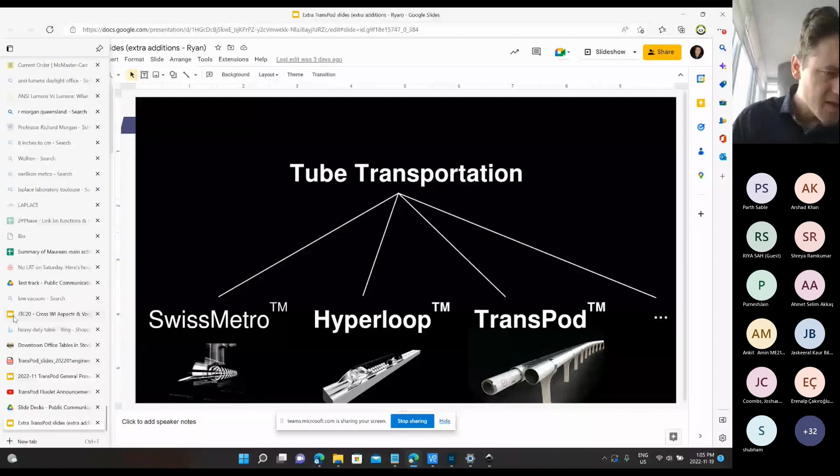Okay, so what I will start out with is a little bit of an overview, straight from the beginning. My own interest is really at the connection between new technology and things that affect people on a massive scale. And that's definitely the case with transportation, because you can't just have an idea that's not really deployable at a huge scale.

And so with big infrastructure projects, there's a lot of financial and practical things you have to think about, but also the human aspect too. How does it affect people, and how do people want to travel? But really incorporating the latest research.

And so my name is Dr. Ryan Janzen, and like I said, this is just going through this. That's kind of my background. And so that all has led up to TransPod. And TransPod is a new type of what I would call tube transportation.

And so these are, by the way, I'll show you some of the exciting new stuff, because these are a little bit old, from years ago. But really the core, and then I'll show you the latest technology that we've actually finally unveiled to the public of what we're really working on.

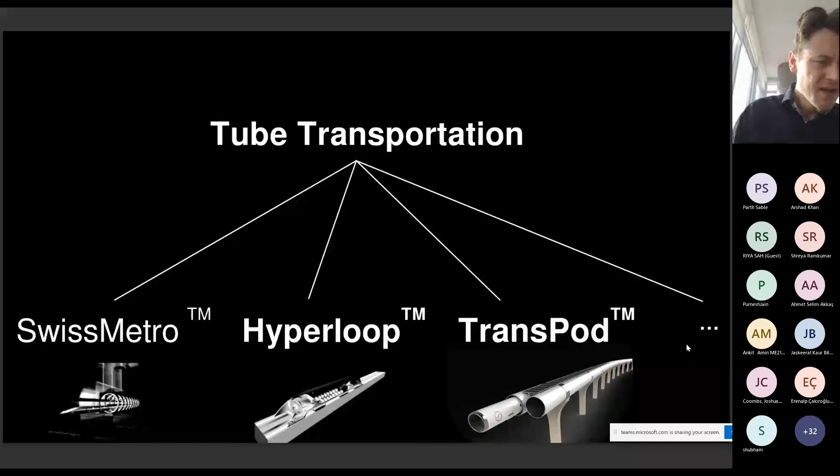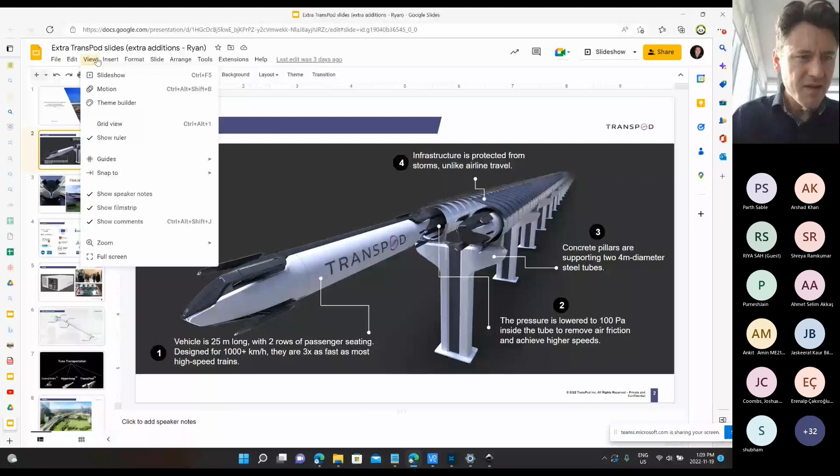But what I'm going to show you is how this new TransPod system, it's not Hyperloop exactly, it's this new type of tube transportation. And you saw those really old renderings, and so what's kind of exciting is some of the latest vehicle designs that we have just unveiled to the public, and I'll just show right here. Oh yes, use slideshow, there we go.

So it's this new thing that I invented a few years ago, but has been very confidential up until now, which is called the FluxJet. And so I'm going to explain what that actually is soon. But the basic thing, when you look at it, it's a new type of vehicle that is a bit of a mix between an aircraft design, operates like a train, but what it actually has is a whole flight control system and some pretty advanced physics.

So on the outside, it might seem like this is just tube transportation, but the way we're designing it is radically different. And some of that has been unveiled to the public, but some of the special features have not yet been announced. So they'll be announced soon. So it's all coming one step at a time. But this is part of the TransPod system.

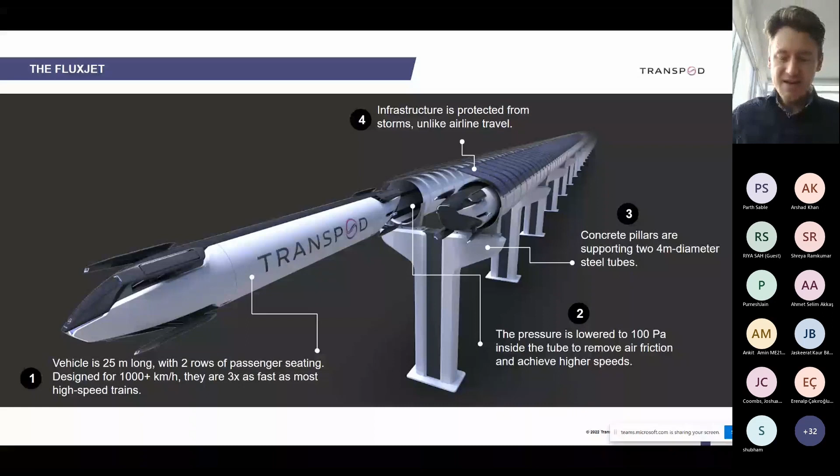That's just a rendering, but we've done experiments with all of these propulsion systems, testing them at over 1,100 kilometers per hour aerodynamic speed, because there are aerodynamics. Even with a somewhat low pressure, you still have them, and so that's part of why we're working with a few aerodynamics experts, including Pierre Sagaut, who's one of the guys who writes the textbooks on supersonic flow and shock waves and so on.

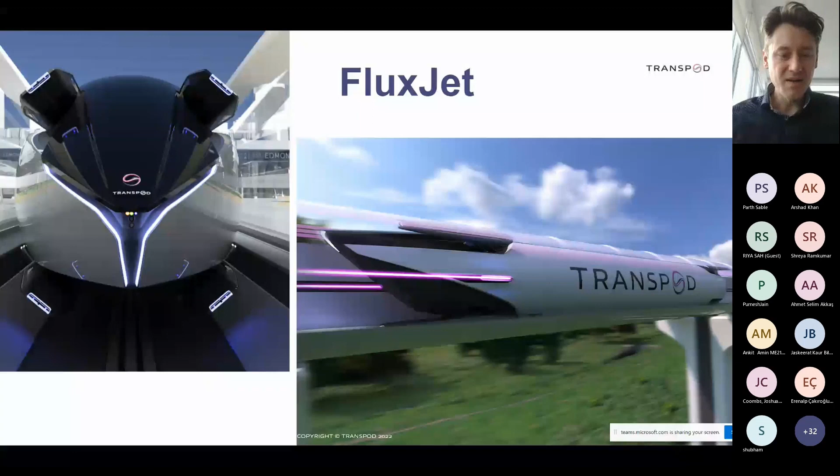But we actually have separate experts in our own team that have been developing this plasma technology. It all fits together, and so it's a really big collaboration. So the TransPod team, basically I'm the inventor of the FluxJet and the designer of the overall system. And our team is in Canada, and some people in a couple of different locations in Europe, where we have centers of excellence of our own team, plus some of these partners.

And actually, it's amazing how a really big project involves a lot of work. Just to see the scale of this, imagine the whole vehicle, like an aircraft. When Boeing or Airbus designs a new aircraft, they have a lot of different subsystems over the whole thing, right? And all of those units are a big design project on their own. So one example for us is this small thing within all the power systems on the vehicle, on this TransPod system and the FluxJet. You break it down in a kind of tree structure, right?

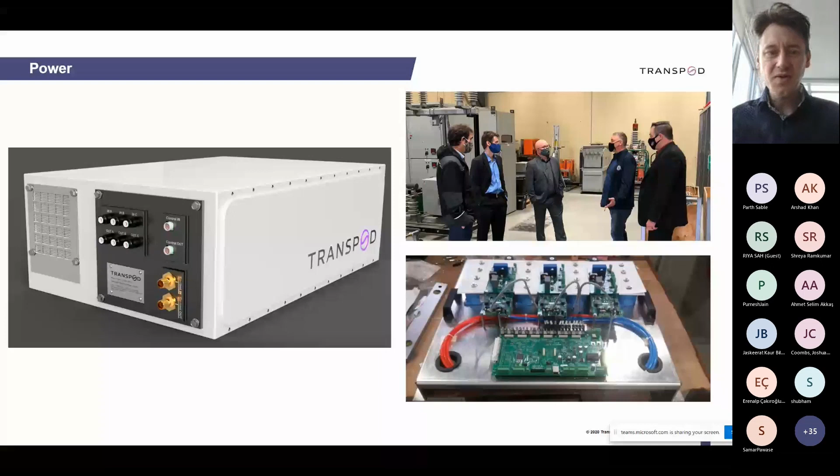So all of this gets broken down, and then how does it get developed? Well, when you think of all these subsystems being put together at the same time, you have to test them. We have been testing high speed; we have the equivalent of a high altitude NASA experimental aircraft environment. We're able to recreate those conditions with high voltages in the kilovolt range, low pressures, and high speed aerodynamics.

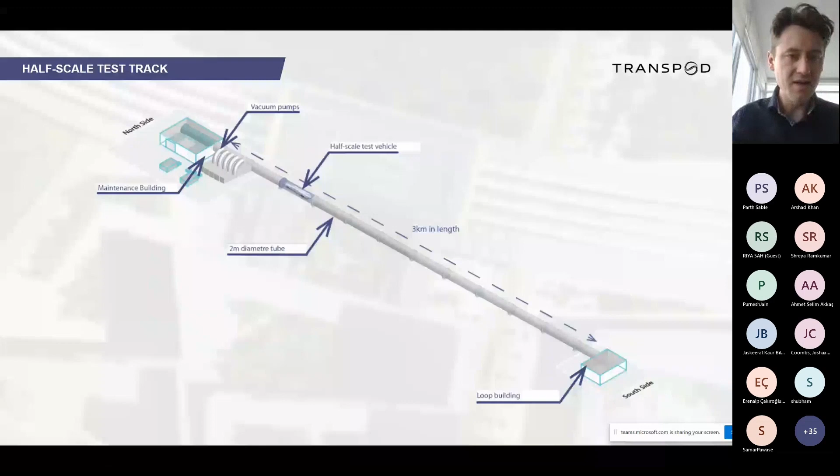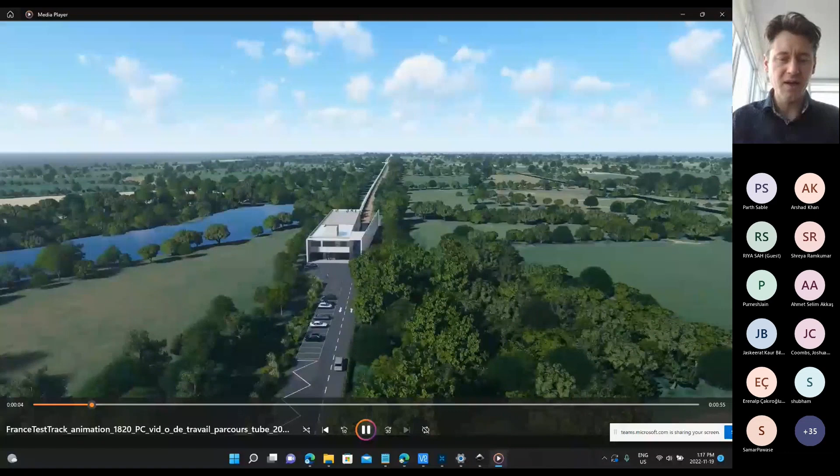With all the different test vehicles we're building, there's a couple things coming next. This is a picture of one where we have the construction permit approved and have started construction in central France. This is a half-scale test track, and maybe I'll just show, I think this one would be nice, to get a little sense of it. It's similar for our bigger scale test track in Alberta that we're working on with the Alberta government.

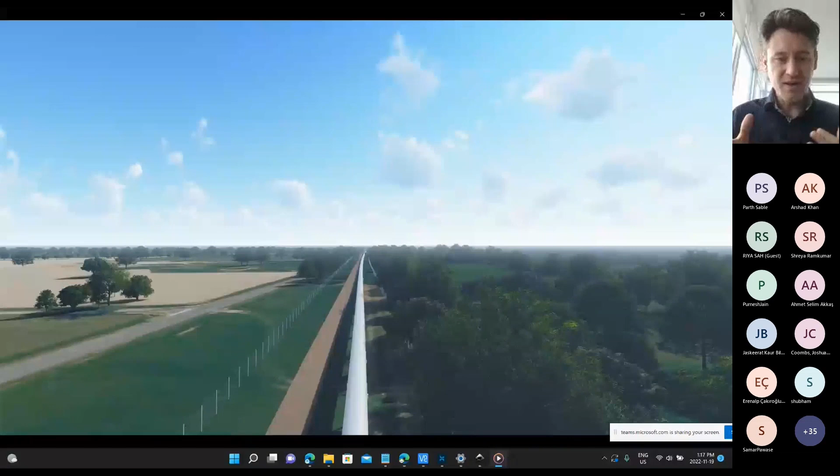This one in France is the architectural design, in a former rail corridor that was decommissioned. You see how it has some curves in the rail corridor, and we're able to take advantage of that, deliberately using the curves plus putting our own curves in certain ways to test the vehicle dynamics as it does curves and slight turns. So this facility is a test, assembly and control building, along with the main part of the test track.

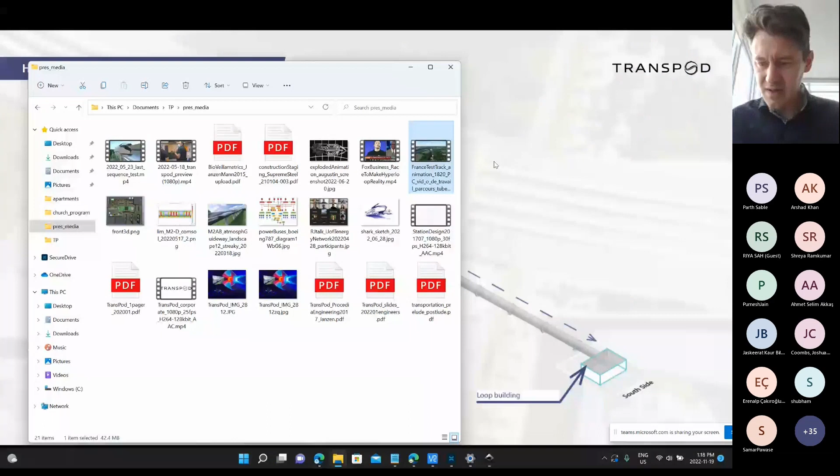This thing is half diameter. Our full guideway diameter is 4 meters, so this is a 2-meter diameter. And working with the Alberta government, we're working on the next step, which is a full diameter test track for the final test, the final certification. So what you do is, maybe I'll just stop sharing for a moment. If you can still see me, okay, yes.

Typically the aircraft companies, Airbus and Boeing, usually build a couple of different models. Often it's at least 3 when they're doing a new aircraft design.

And so they have one that is usually kind of a static model with all of the systems integrated and everything, and they do some kind of stress tests on it. There's often another one that is used for destructive testing. So if you can imagine a beautiful, maybe $100 million aircraft that they're building, they put the wings into a vise and start to bend the wings as if you're in far worse than the worst storm they're planning for, and they bend the wings at a really horrible angle until the whole aircraft basically explodes and breaks. So that's a certain kind of destructive test that they have to do.

And so it's the same with us. We have a sequence of test vehicles at full size that we're going to be putting through that full-scale test track in Alberta. And then all the regulators that we're working with in Europe and the US will be traveling there to work together on the final certification.

Okay, so now if I share that again, what I want to do is show you a little bit of the process, and this is the final unveiling to the public.

Now I'm not sure if you can hear the sound.

So that is a little bit of the announcement that was done a few months ago to finally unveil this FluxJet.

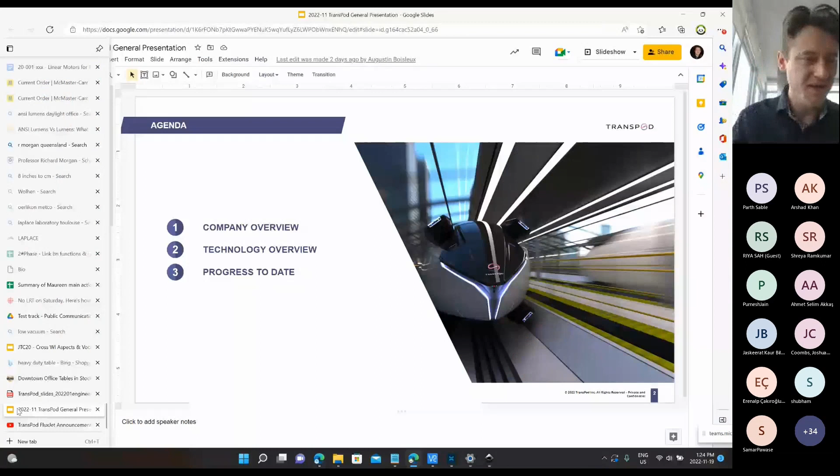And by the way, I'm going to play a few other things. Can I just ask if the sound came through on that one or not? Yes, it works. Okay, good. Okay, great.

Thank you very much. So now the really interesting thing is, you know how I said all those different scale models. There was another one that we unveiled to the public that was just a little bit smaller, kind of a demonstrator, a smaller scale version of this full vehicle. And actually, before I show the overall slides of that, I'll just show little parts of this.

The FluxJet is a bold innovation. I'm Mustafa Shaheen, Edmonton Global's Executive Vice President. Alberta contributes $330 billion to the economy of North America, and Edmonton is Canada's fastest growing region. The TransPod FluxJet line is an exciting project that will enhance regional connections and accelerate transportation at a massive scale.

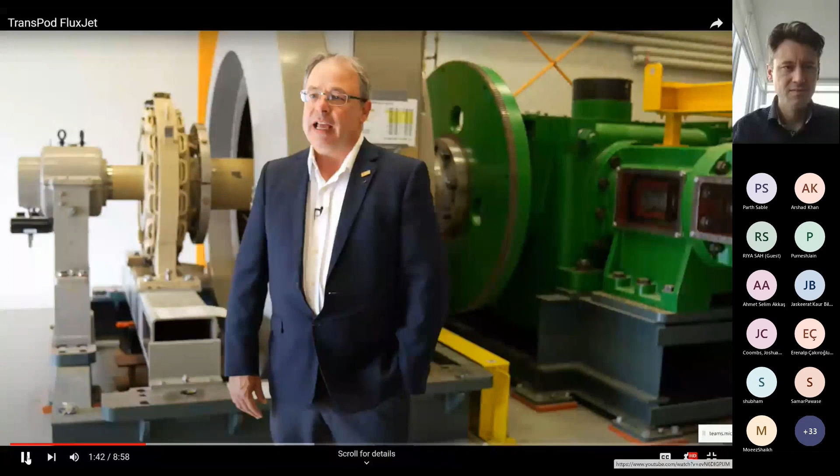The FluxJet is an exciting, major project that will put a global spotlight on Canada and Alberta. We look forward to participating in new industries and bold new projects that revolutionize transportation as we know it, to help us reach our net zero goals by 2050. The TransPod FluxJet line is that project. Our workers handle billions in construction work each year, and the TransPod line is ideal for construction at a mass scale. The FluxJet is a bold leap forward in technology that we're incredibly excited about and to be part of.

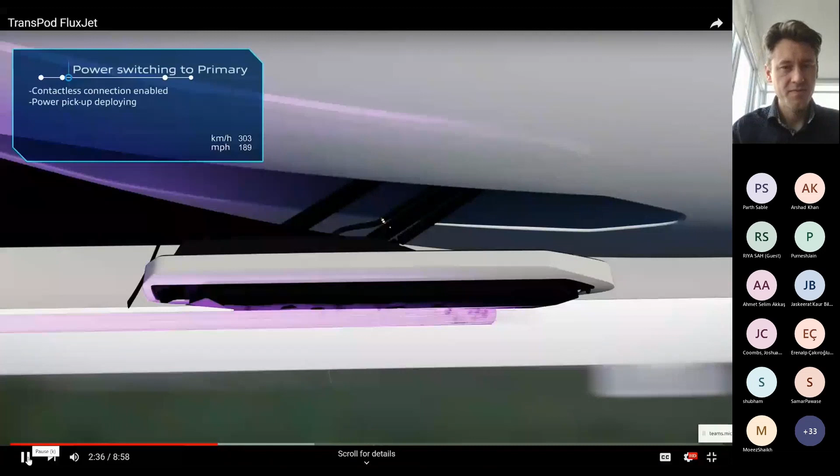Okay, and what's exciting about that is we're actually using plasma to get power to the vehicle. What the heck is plasma? Well, who here has seen the Northern Lights? Let's take a look. And that's actually plasma up there. So it glows. The FluxJet is harnessing plasma to make it work. And that is groundbreaking.

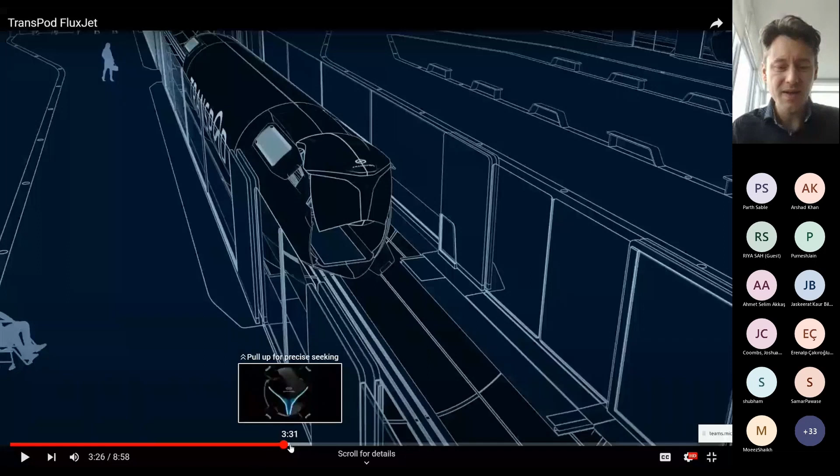Okay, so that was actually kind of chopped up a little bit, but you start to see a little bit of this new vehicle design. And so when you see the scaled down models, this is what it's actually representing. So this is the full FluxJet, and I'll show you how that works in a moment. But what I want to show you is just, again, a little bit. Ladies and gentlemen, a baby FluxJet.

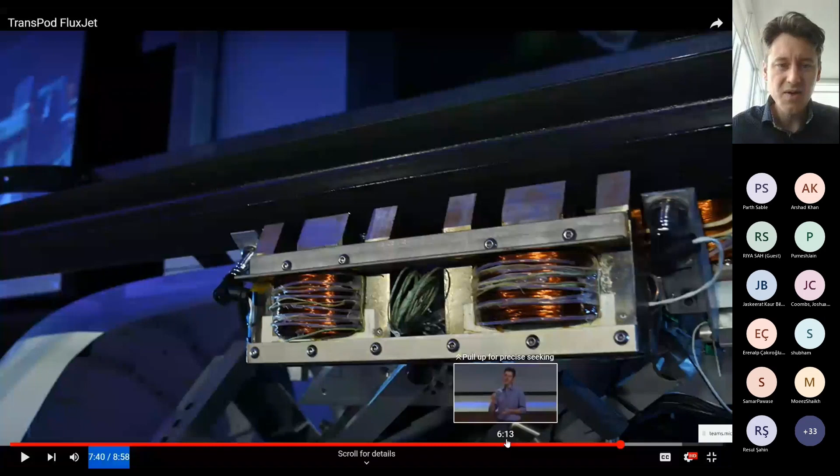And what's that? Well, I'll just show you up close. So there's no contact, first of all, and it's lifting this 1 ton of weight with some of those levitation systems there. Let's just zoom out again. So what's going on is that it actually has linear motors on some of those boom suspensions down here for propulsion forward and backward, and then levitation systems here. And what the whole thing does is it's able to rotate and cant the vehicle and make it go up and down, or make the vehicle go straight while the infrastructure is going up and down at high speed.

Now that's kind of the basic thing. But a predictive suspension system is the world's first system like that, and patented, so this is going to be the only one. It's really essential for any kind of tube transportation, and we have the world's only system that is actually successfully able to do this. When you have the infrastructure and you're going at high speed, you have to go in a fairly straight line. If you're in a car driving on the highway, it's not too bad if the asphalt has a few millimeters up and down, because you're going maybe at 100 kilometers per hour, which is a relatively low speed compared to this.

But when you are going at over 1,000 kilometers per hour, tiny little changes are very aggressive and bumpy for the passengers, but also potentially very damaging for the propulsion systems when you have magnetic gaps. And so this is a suspension system that actually does one step better. In your car, you usually have a passive suspension, with a damping mechanism. People who had a mechanical engineering class may know critical damping, that kind of thing. So that's a passive suspension system.

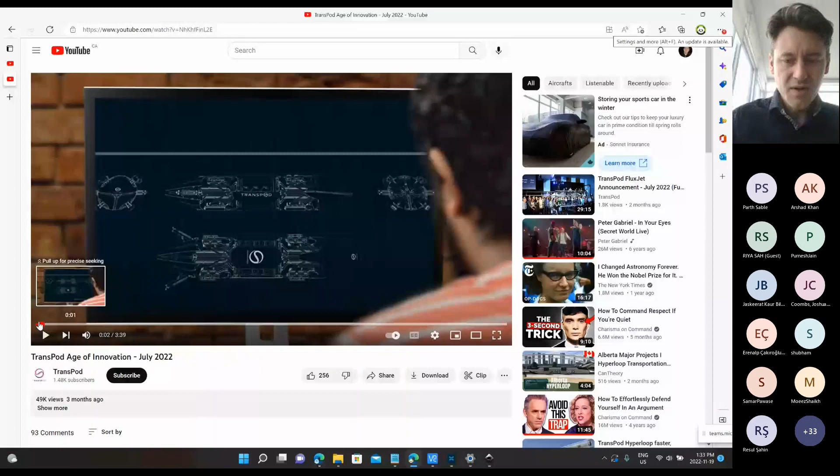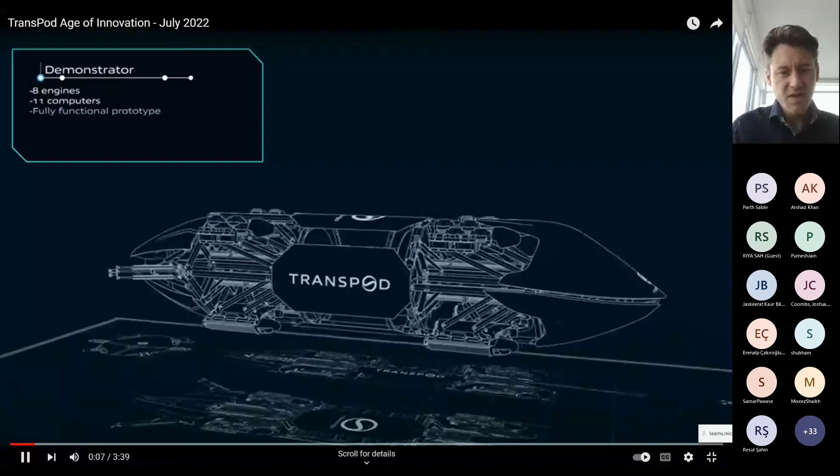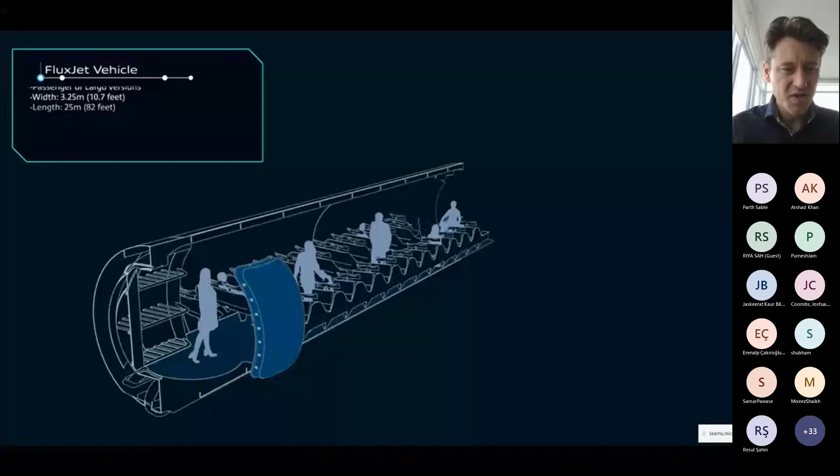Meanwhile, another part is this plasma technology. I don't know if this video has some of the high-speed demonstrations of it, but anyway, this other video, I'm just going to show you. Okay, so that vehicle that you just saw the pictures of, with people sitting in front of it, now see how it compares to the full FluxJet, which is bigger. And so that has that amount of space there for passengers or for cargo.

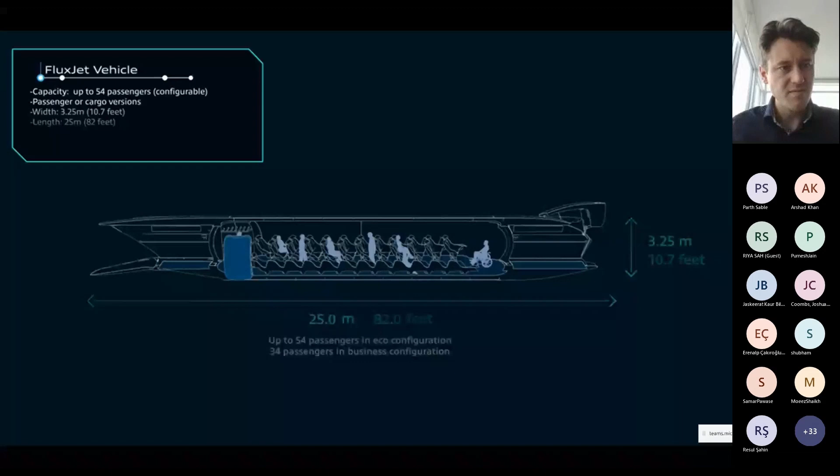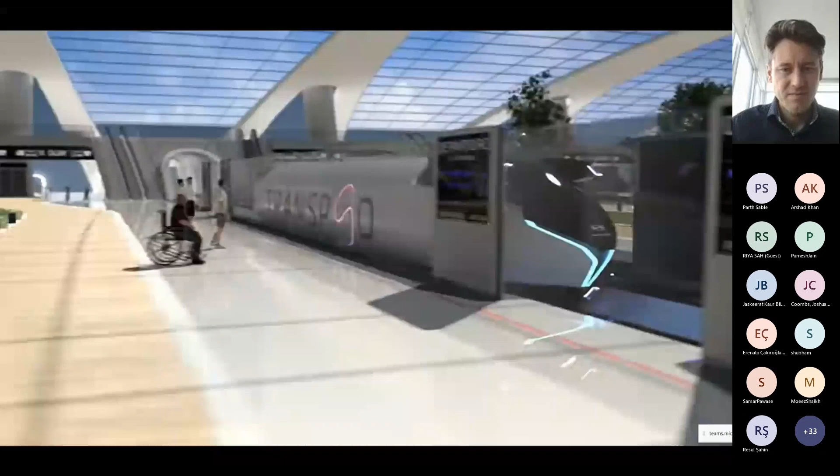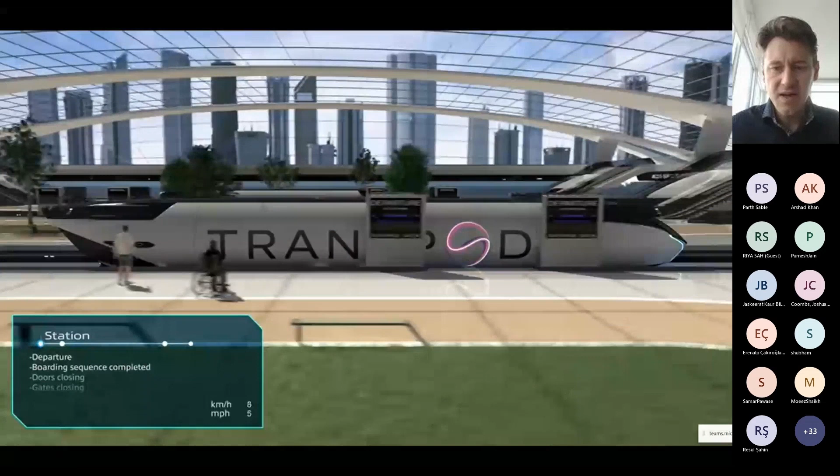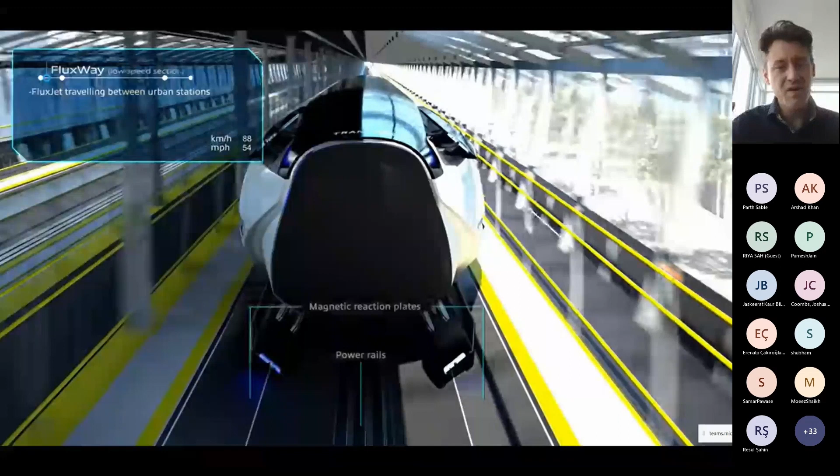It's designed to dock at stations. The TransPod station design is kind of like a high-speed train station or subway station. Okay, and then we start going, and so what's special? This is another reason why this is not Hyperloop anymore. For me, Hyperloop is a different thing, a little bit older philosophy, a different type of tube transportation, and this is completely different because it's sort of an atmospheric guideway here for interurban travel.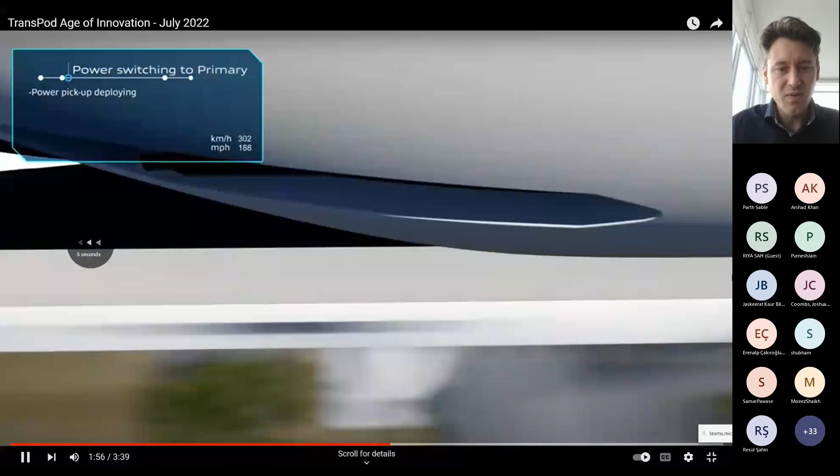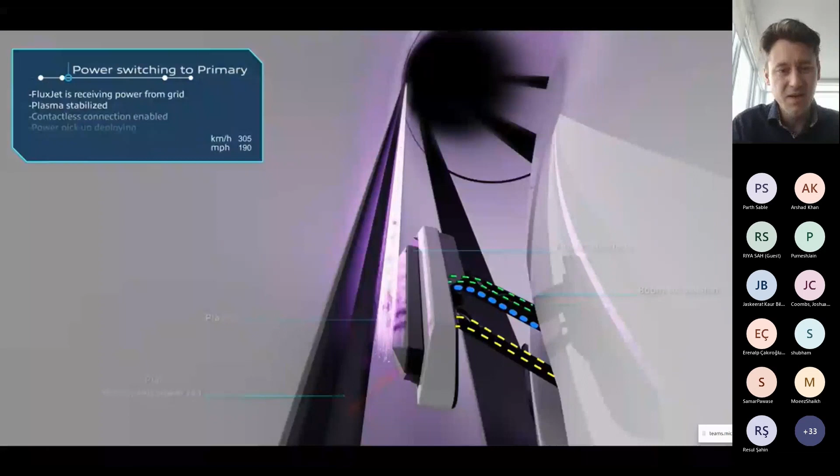Meanwhile, once we want to get into this high-speed section, now it's tube transportation in a way, so we go through the airlock into this high-speed zone. Now we want to see when it gets into the high-speed section, switching power over to receive power from the grid using this plasma system. There's a lot of science behind how that is working. I'm just going to show you the interesting parts here.

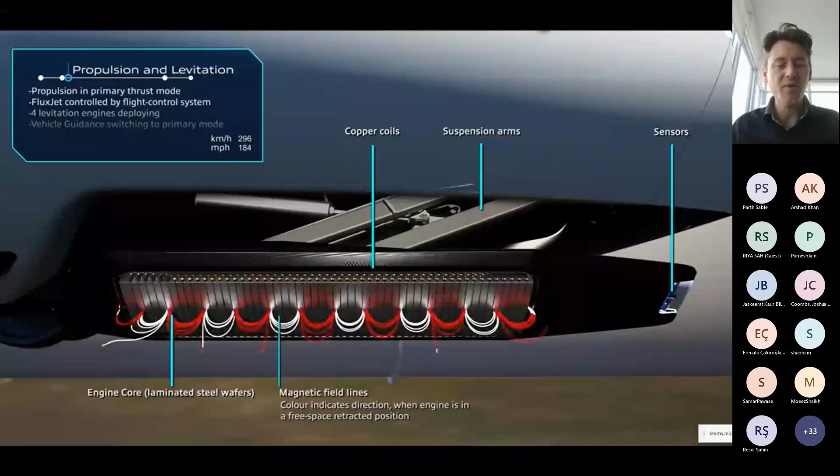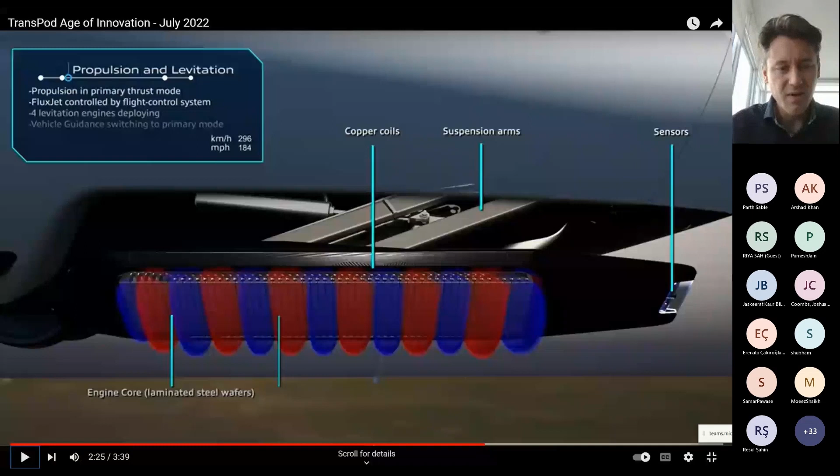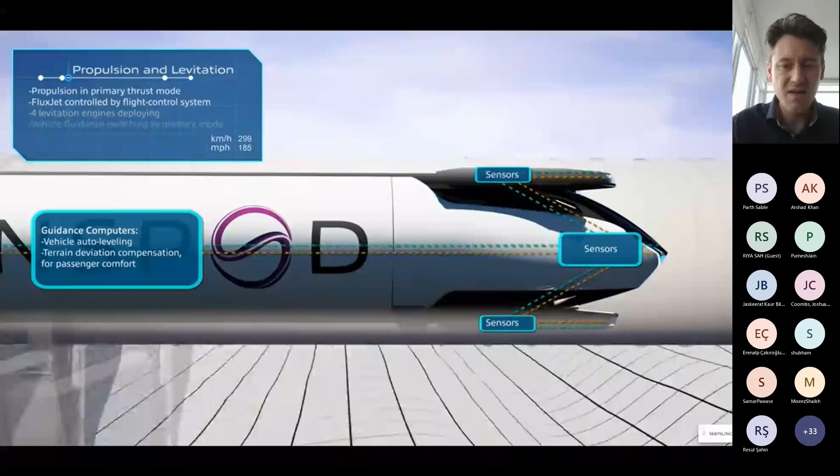These linear motors, by the way, this is a simplification. We have a more advanced system than this, but this shows the moving magnetic fields that are created by a linear induction motor. And you actually see, it's pretty neat, the optimization of the pole systems and everything like that. But anyway, it's making a moving magnetic field that pushes it forward. And then maybe another interesting thing, let's just show you this.

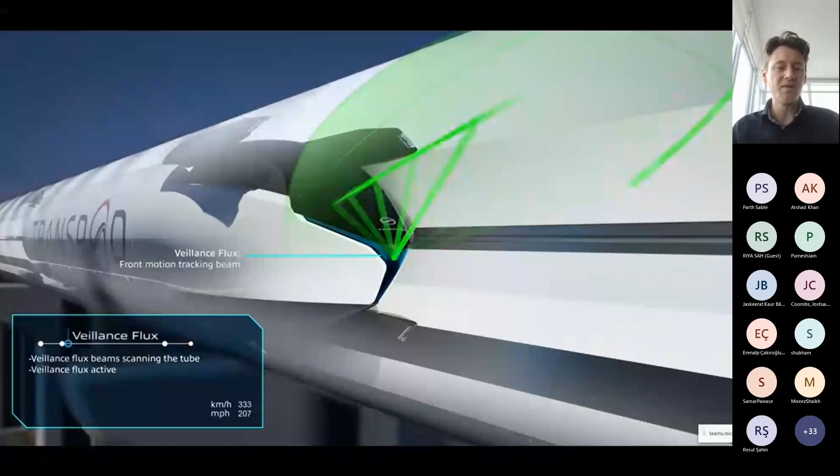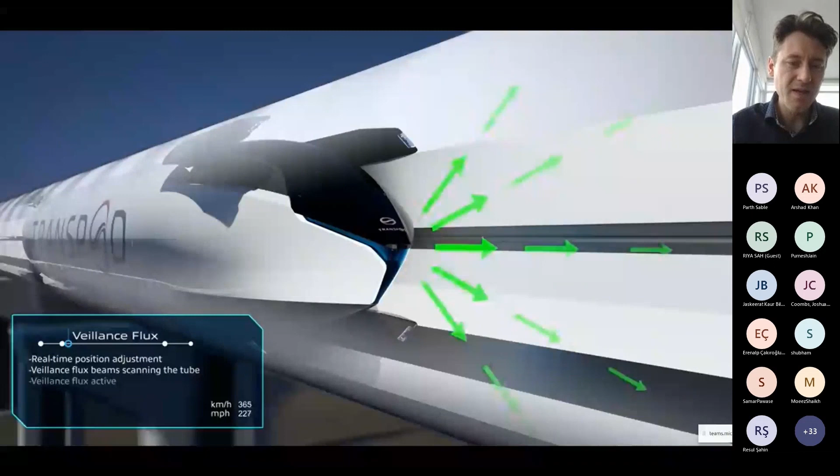Okay, so this Veillance Flux. That's a whole other new technology. It's part of the flight control system and part of the predictive suspension. Veillance Flux is another new breakthrough in physics where you're actually seeing sight and sensing itself. Sensing itself, that's what Veillance Flux is for. So it's not just sensors, but it's sensors of sensors.

With Veillance Flux, we can actually track the ability to see and the ability to sense through space, and we can actually see what we don't see, and this is partly for safety reasons at high speed. We need to be able to size up what all the sensors are doing and see if there's any potential imperfection in the track or thing that we need to avoid at high speed. And that's really where we need to use veillance.

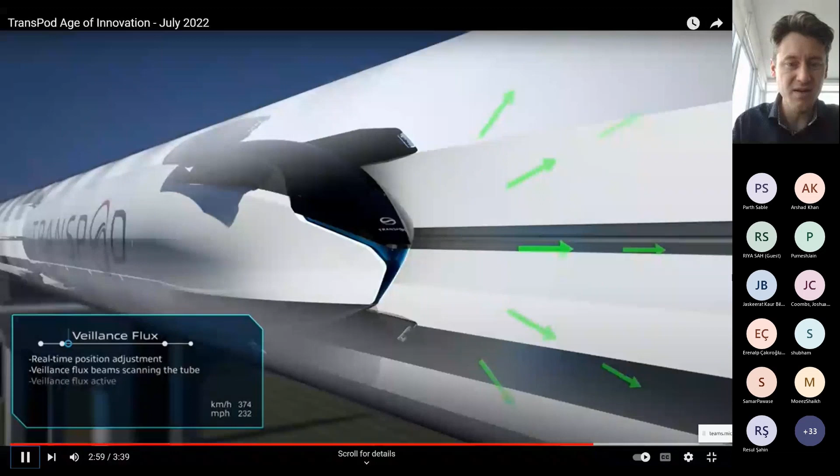You can actually look that up. There's a lot of papers on Veillance Flux. If anyone is interested, I can send more information about that afterwards. And so then we are up to full speed.

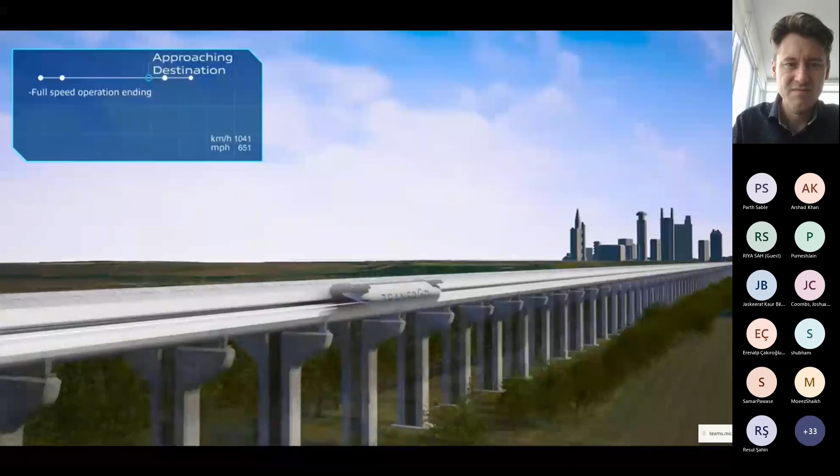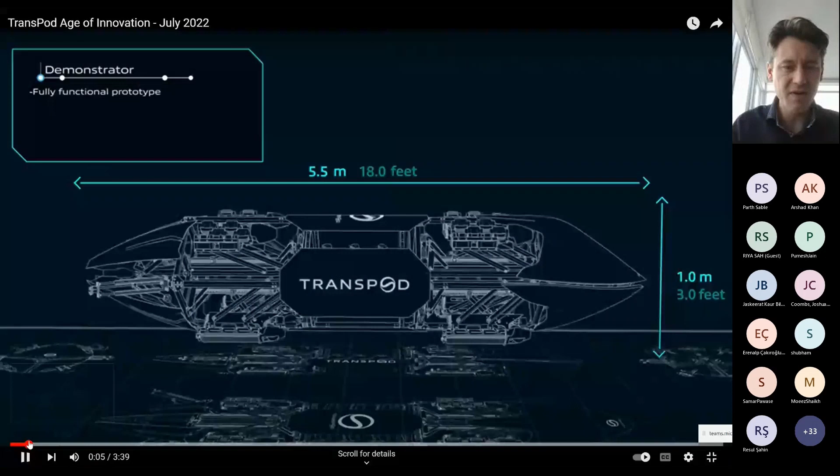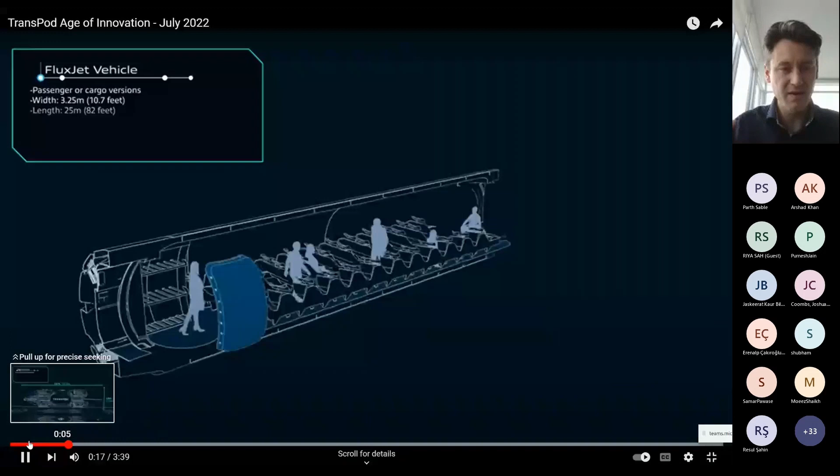Okay, so that is a little basic sense, and just to reiterate, it's kind of neat to see the scale of this. When you saw those dimensions, just imagine that central area, the center fuselage, is really stretched the most. That's the biggest change, but then everything else is scaled up for this full scale vehicle. So there you go.

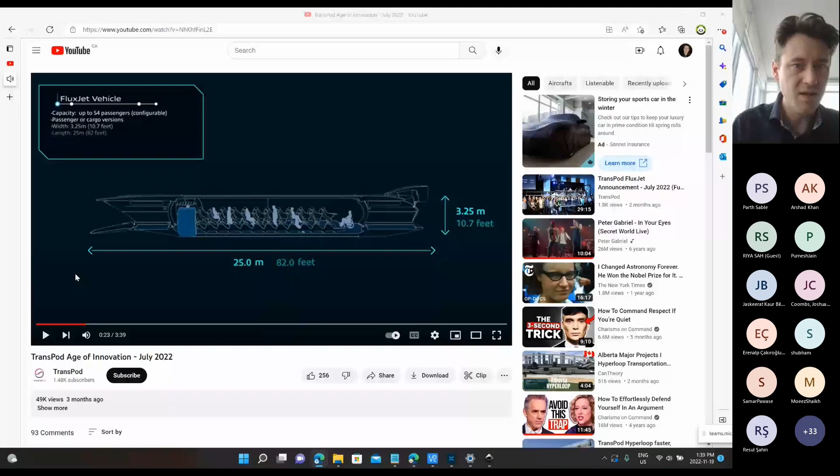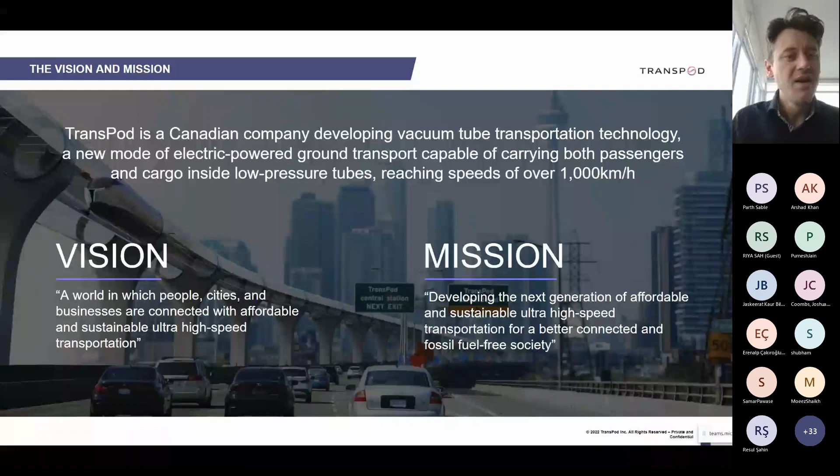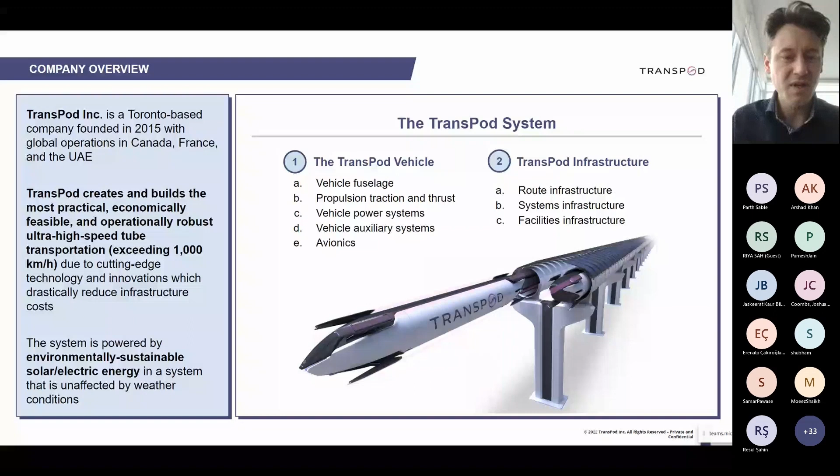And then if we just go back here, what I want to do is really kind of explain. So as a company, part of it is transportation, but really part of it is technological innovation. So working with universities, working with the biggest research agencies, and then partly developing this overall system, and partly working with many other partners on that. And there's a few of us that started this company, and we're working on the business side too.

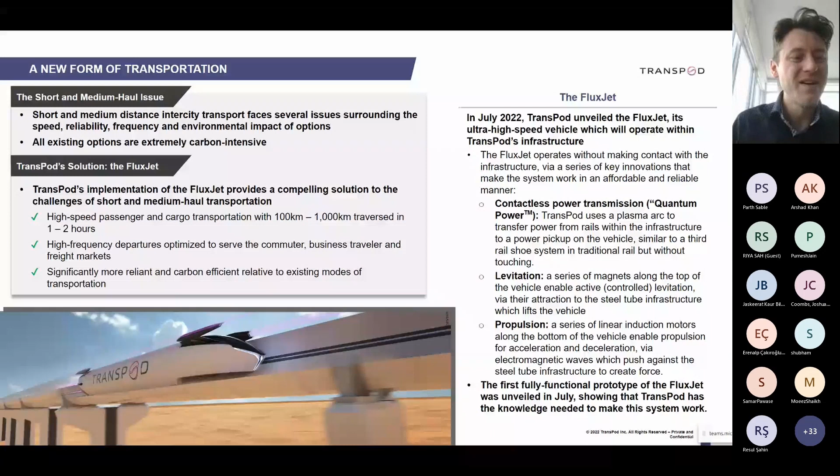So maybe I should say also that the reason why it's called the FluxJet is it's combining the electric flux from the plasma, so contactless plasma, magnetic flux for the propulsion, and veillance flux. So electric flux, magnetic flux, and veillance flux. That's a summary of the secret behind the FluxJet, but there's a lot of cool stuff that actually makes that work. So it really goes together like that, and it's the vehicle but also the infrastructure that makes it work.

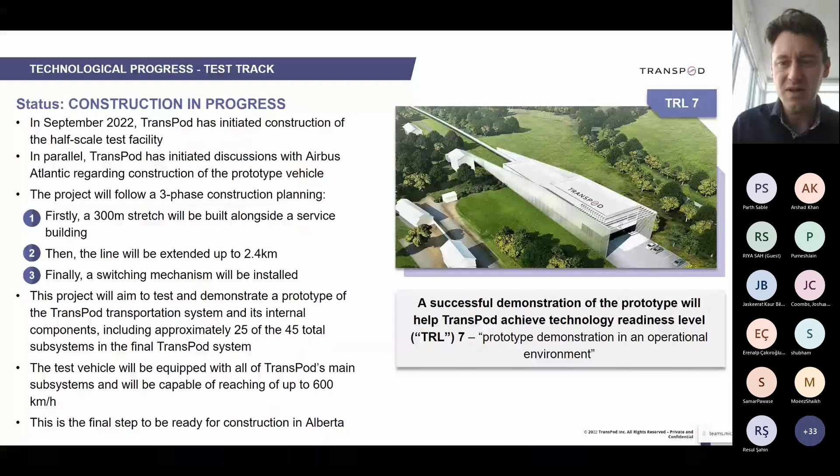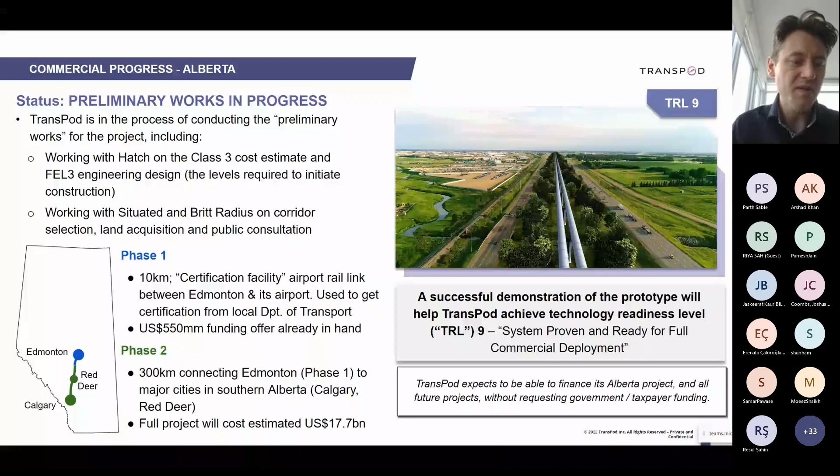So that's part of the announcement there. And meanwhile, part of the exciting thing with the Alberta project is it's actually working with the Alberta government on a full line between Calgary and Edmonton. This test track is going to be a part of that. So you build the test track first, and then you extend it for the full line afterwards. We're also working with the state of Texas transportation authorities on a line there, so early funding and studies. Also in Australia and in the UAE.

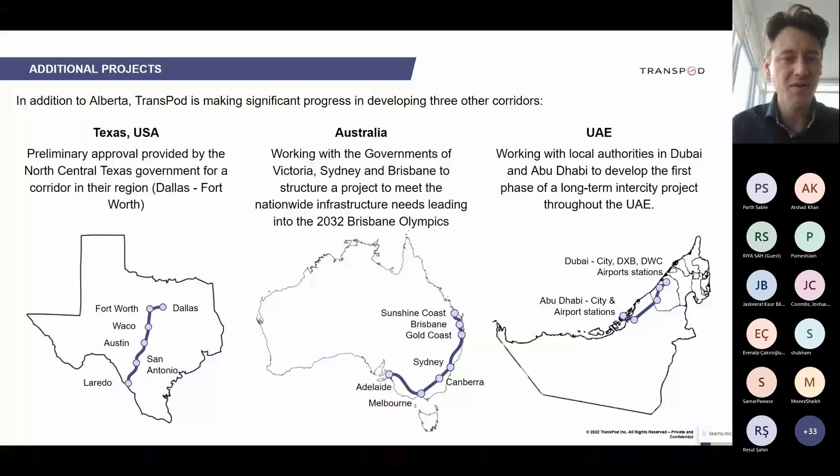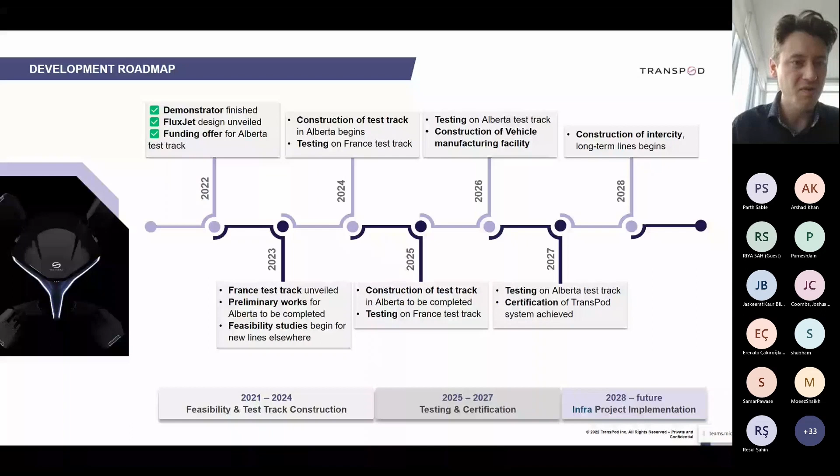Now the interesting thing with the UAE context is that you have major cities there, Abu Dhabi and Dubai, where the airports need connections. So part of it is local airport connections, but also the intercity travel. And overall, that timeline, and by the way, I think we can take a lot of questions here, and there will be a lot to show you on some of the other parts of the technology. But basically, the timeline going ahead has a lot of steps to bring together, but it's really towards testing and certification.

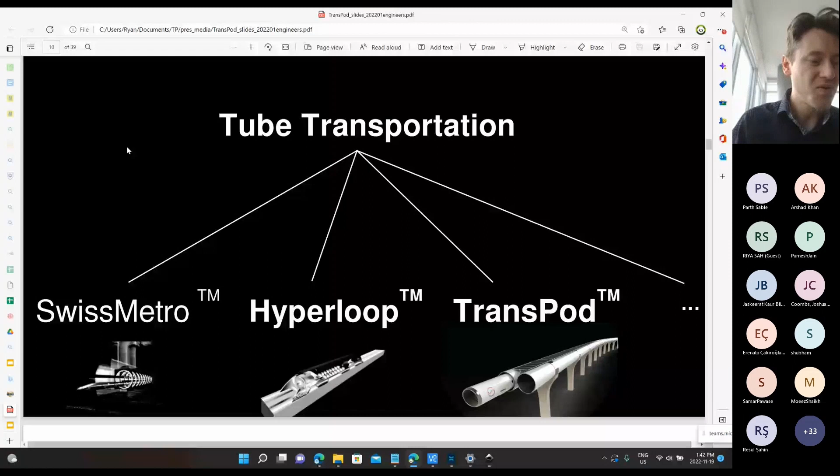And then it really all gets tied together because we're trying to create... And by the way, if anyone has a better word than tube transportation, you can say vacuum transportation or vac train, but some people might get confused by it, or it sounds a little more aggressive. So there's lots of options, it's really open to people's concepts of that. I'd love to show so much more. If anyone has any other questions about

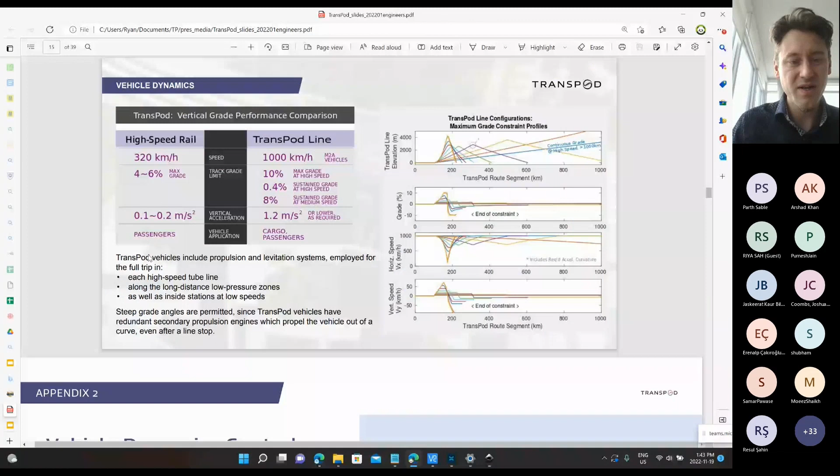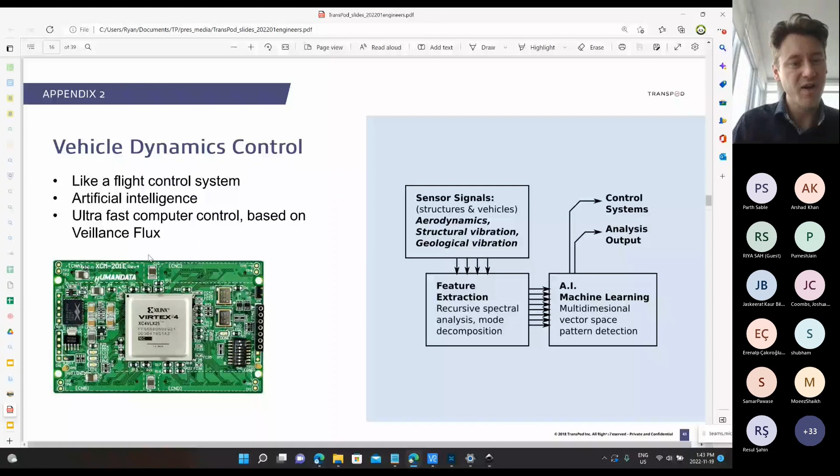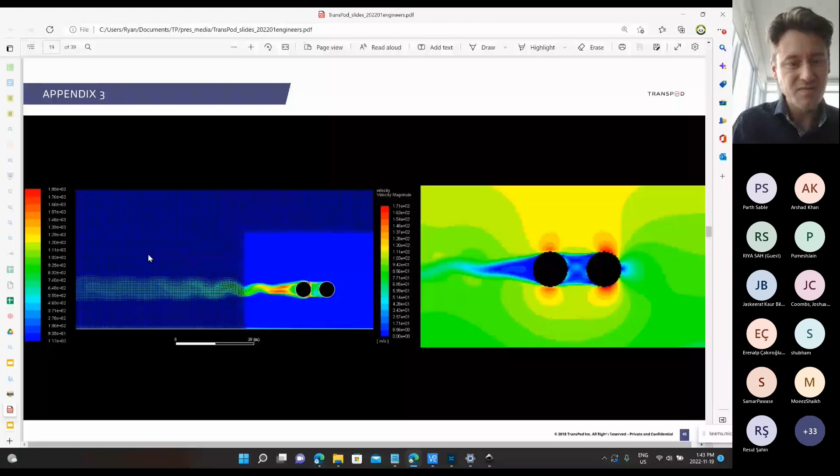and by the way, the interiors of the vehicle, that's not as critical of a thing. Some of the acceleration profiles, some of the real-time control, there's even a little bit of machine learning, but my philosophy is it has to be deterministic as the primary method. And then some of the aerodynamics. This is actually hurricane force winds on the side of our infrastructure. You have to design it for a 500-year storm and really withstand earthquakes, vibrations of the infrastructure and so on. So I guess that's really an overview.

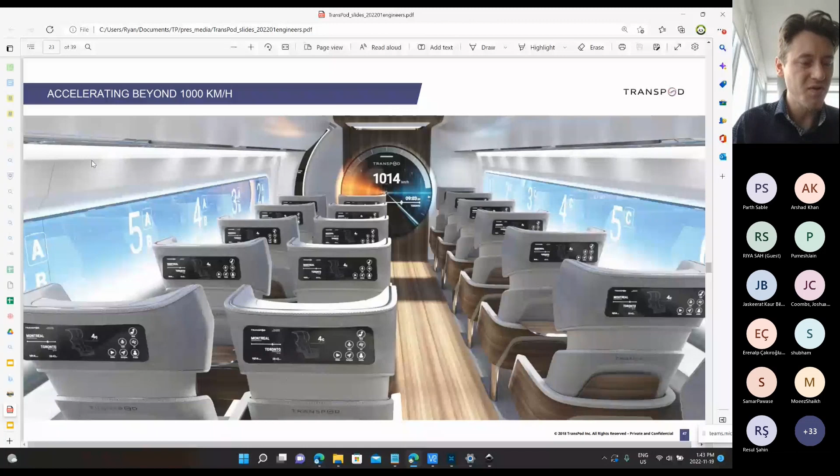So what I'd love to do is take questions from people now. There's so much to show, but it would be great to see what people are interested in the most, and maybe afterwards, if people want, I'll give a few more words about other inspiring stories about starting companies and my advice to people. So thank you very much for being here, and I'd be happy to take some questions right now.

Amazing, thank you so much. So we have a couple of questions in the chat from Alex. The first one is, based on the power requirements you mentioned offhand, this will cost around $5,000 per hour to operate, excluding compressor requirements. How will you compete against other offerings when the ticket price is $90 to $150 just for the power?

Maybe you could show me your calculations sometime. But actually, the short summary is there's been a very careful analysis of all of the costs, at least for the TransPod line. It might be different depending on what kind of system you're basing it on, but at least for a TransPod line, if you go through all the calculations of the operating, you have to think about the operating, even the staffing, operating expenses that also include maintenance, line operations, and definitely power, like you said.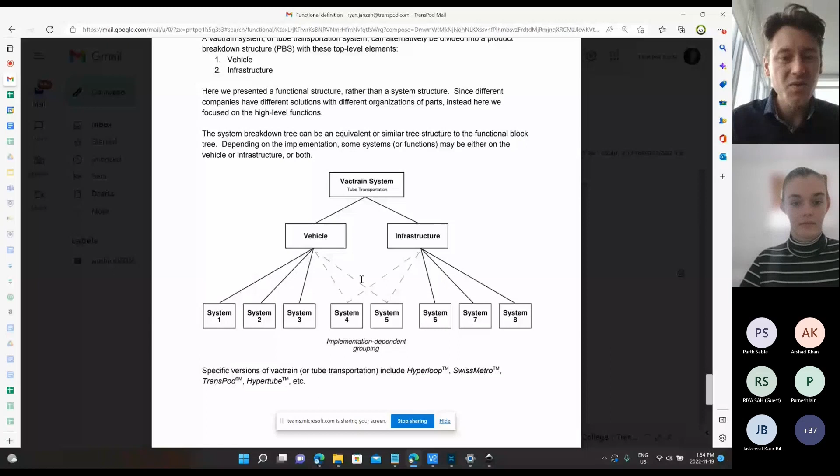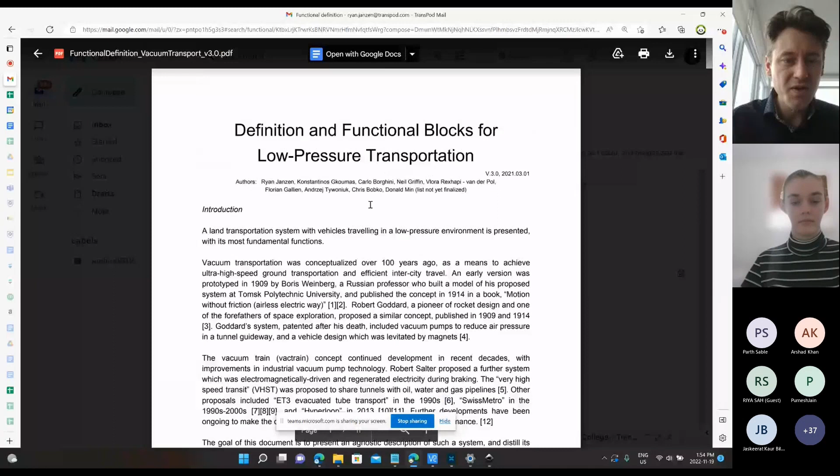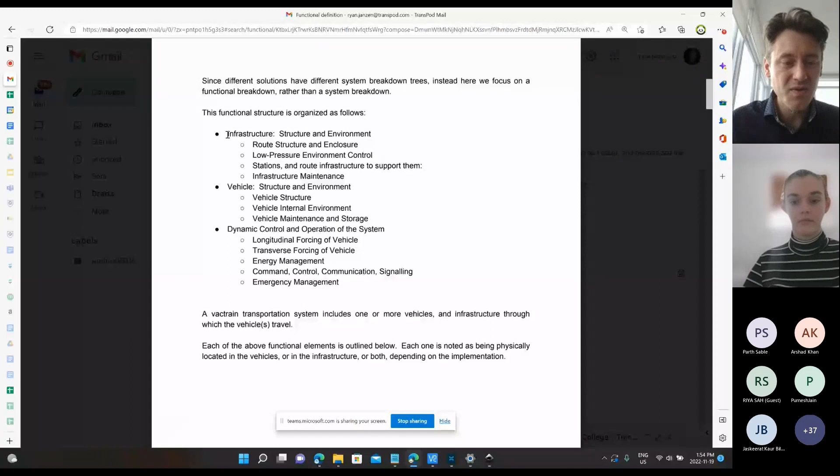So for vac-train transportation or whatever it is, not necessarily Hyperloop, not necessarily TransPod. If you break it down, we're trying to make it implementation independent, or technology agnostic. So you have the vehicle and infrastructure. What it's trying to do is, no matter who's designing something, it can all account for that. And with all of the things you guys are thinking about, my challenge to you is to see if you can think of anything that's not part of these things. What this is trying to do is come up with 12 different functional blocks, a functional breakdown of everything that's there.

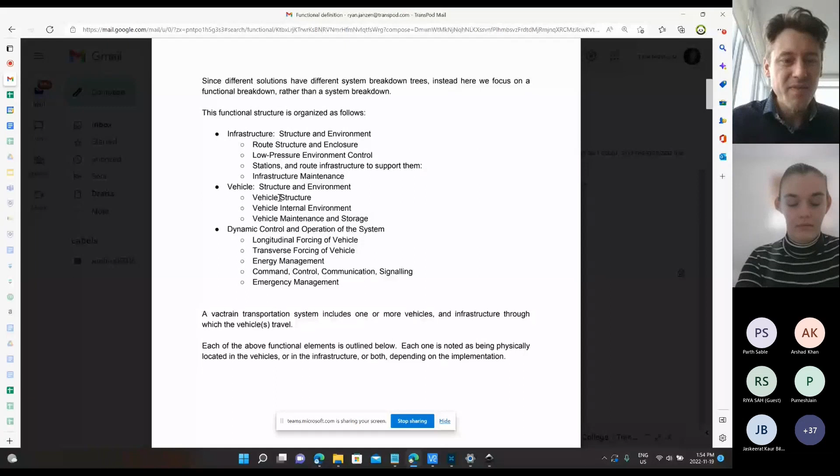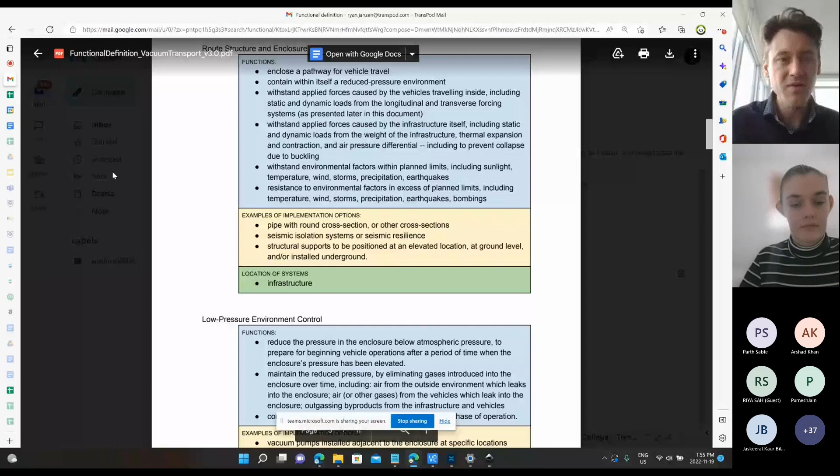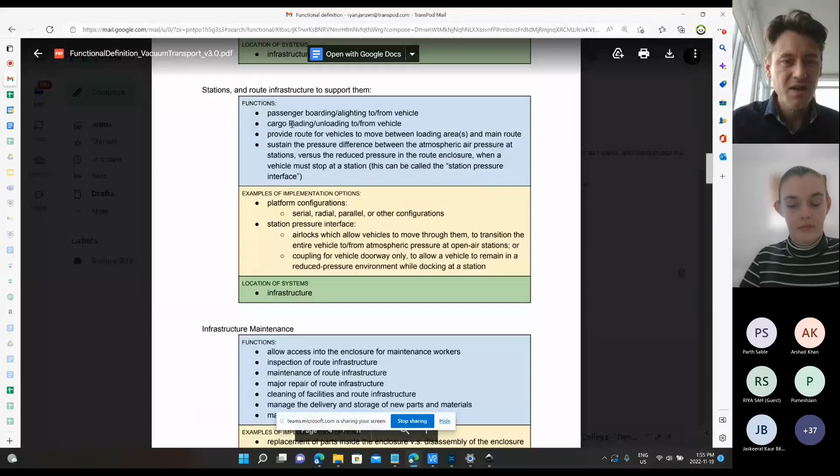So for example, rather than saying a tube, part of what the TransPod line is, it's not just a tube. There are some other aspects of it that are kind of fancy, that are different than Hyperloop. So in general, it's route, structure, and enclosure, with all these different things. It has examples of how you can do it, but that's not to say everyone has to do it that way. Same with low pressure environment control, stations and infrastructure to support them, and then the maintenance functions, because this is not a system, it's a function. Then the functions of a vehicle: structure, internal environment with pressure control, temperature control, and so on. Maintenance and storage of the vehicles.

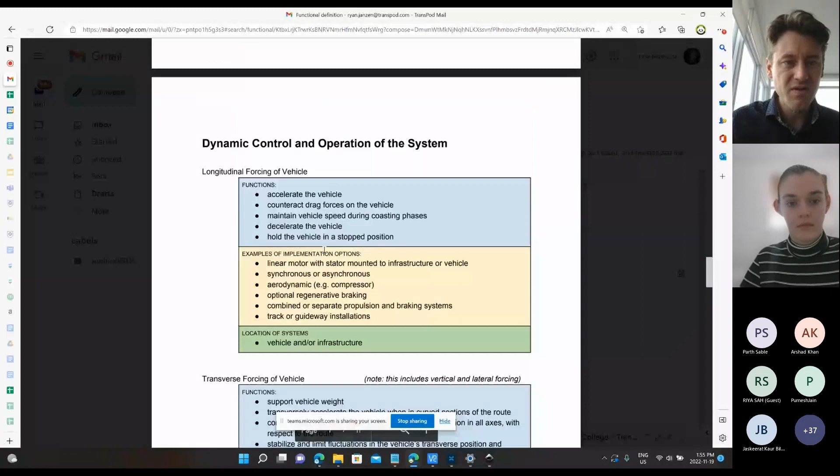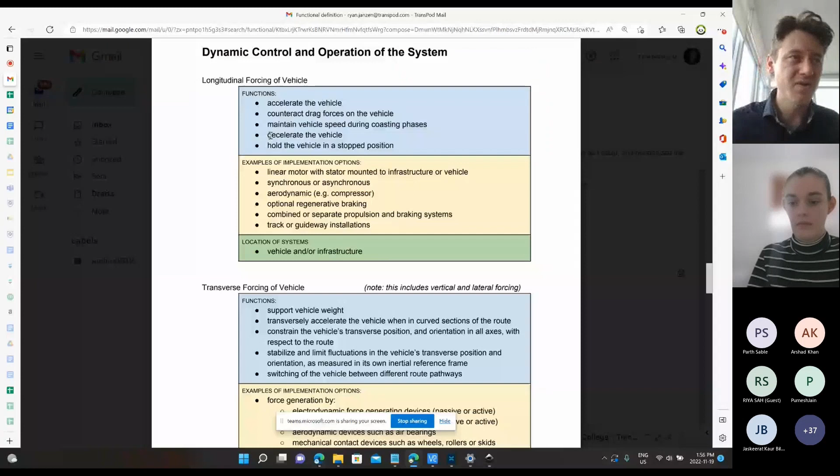One of the big things is that a lot of the regulators don't understand the difference between movement and forces. So this is trying to make sure they understand that, to be most general, whenever you have brakes or linear motors or anything, even aerodynamic forces, they provide forces. Force is different than motion, and that's one of the biggest things I've had to explain to them, along with the difference between longitudinal and transverse. Longitudinal is along the direction that you're going. For us, that's the x-axis, and then the y and z axes are transverse.

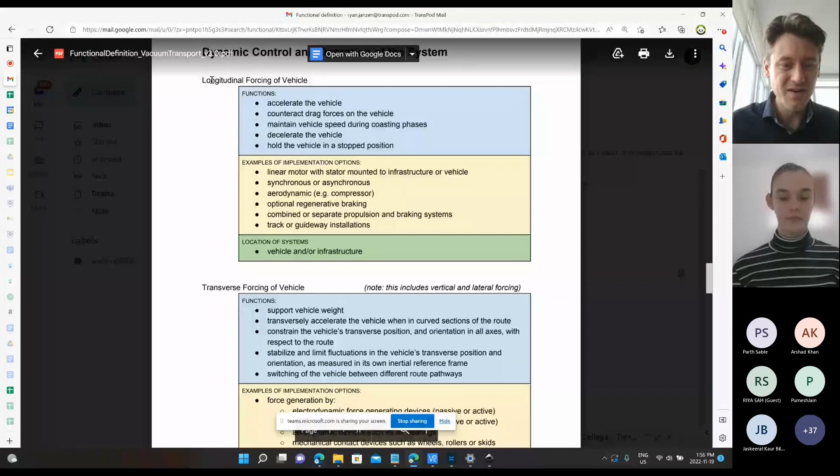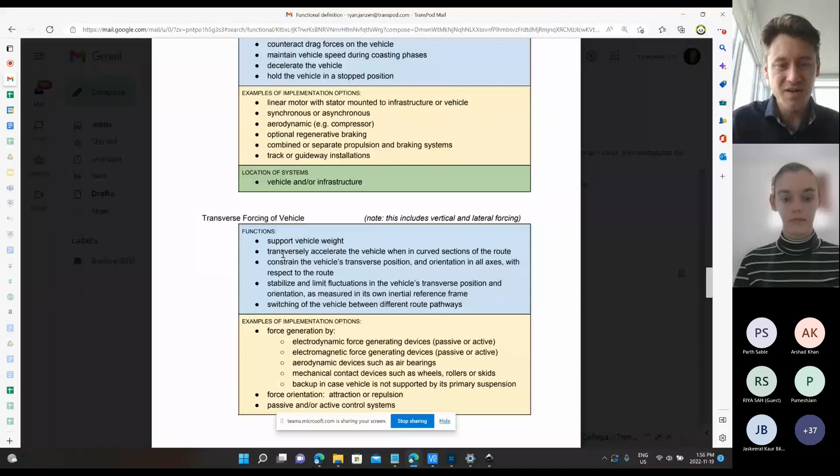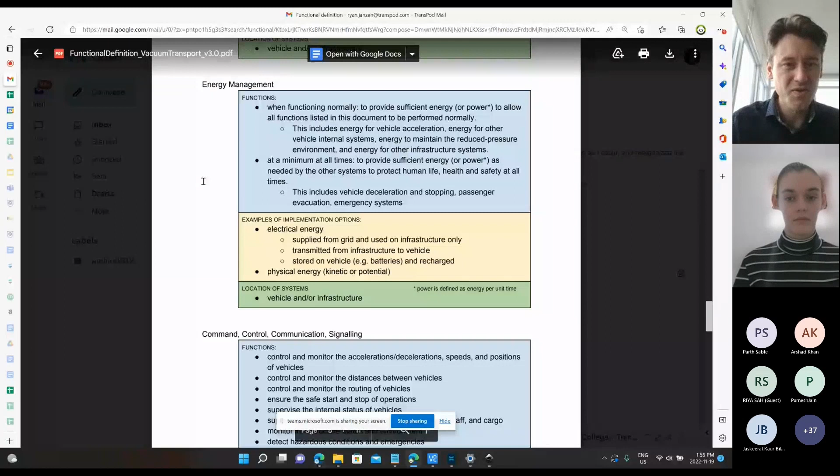And so, no matter who's designing something, you want to make it very generalized, so that whatever the propulsion, or if you have some kind of passive system, it all works, it's all accounted for. And then energy management, because you don't want to say it has to be with batteries, or it has to be with a power pickup, or whatever. You just have to manage the energy, and command, control, communication, and signaling, and emergency management. And so then it all breaks down.

So anyway, that is a huge amount of committees and work that we've been doing in Europe right now. And by the way, in Canada, it's possible that the Canadian regulations may actually start to go faster than in Europe even. So all of this is a big project to get the certification ready. So that's a good collaboration.

Okay, thanks a lot, sir. Yeah, and so to everyone there, feel free to put out ideas if you see anything missing, even with the whole concept of tube transportation or vacuum transportation, vac train, anything like that. If you have any nice ideas of words that would be great for a general summary of what this whole field really is, technology agnostic, then feel free to reach out.

Awesome. Andres, you have a question. Yeah, thank you. Hi. I had two, but I think the session ends at 2 p.m., so I'm just going to ask the second one. First of all, thank you for the presentation. It was really great. I think most of the people in attendance here are university students, and obviously we have an interest in tube transportation.